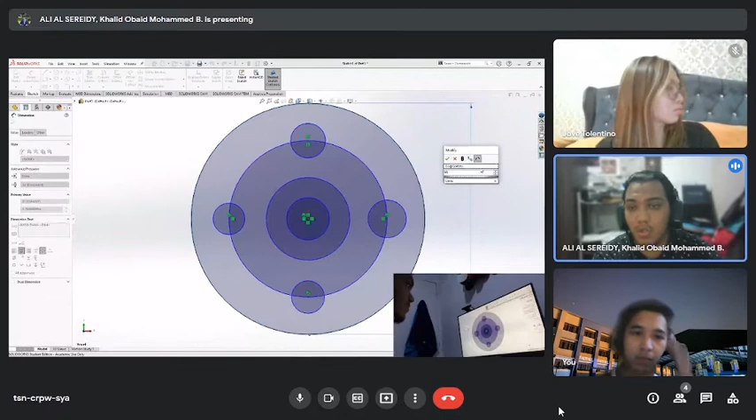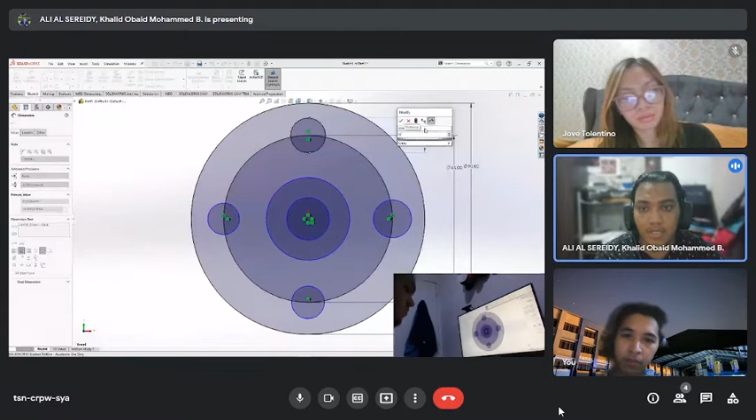After that, we're going to use the Smart Dimension tool to set the dimensions: 90 diameter, then 65 diameter for the distance from the center point of the smaller circles. Each small circle is 12.5 in diameter. We also have two more different circles in the middle, which are 13 diameter and 40.

After that, exit the sketch. Then let us extrude.

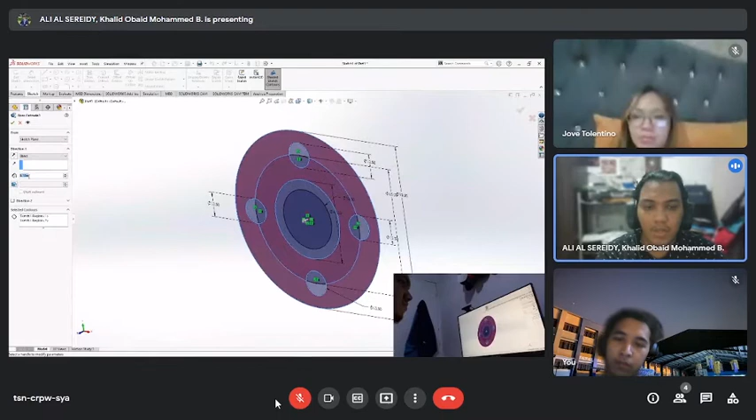Extrude the base. Let's pick the portions and then edit it. Edit the width, which is 14.2 inches. And there we have our first extruded body.

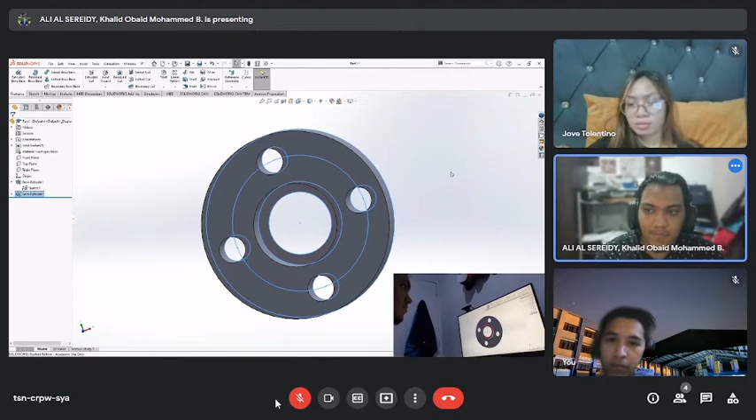So we're going to go back to the sketch from earlier, then choose the next body to extrude. For this one, the width will be 14.2 plus 44.2 plus 6 inches.

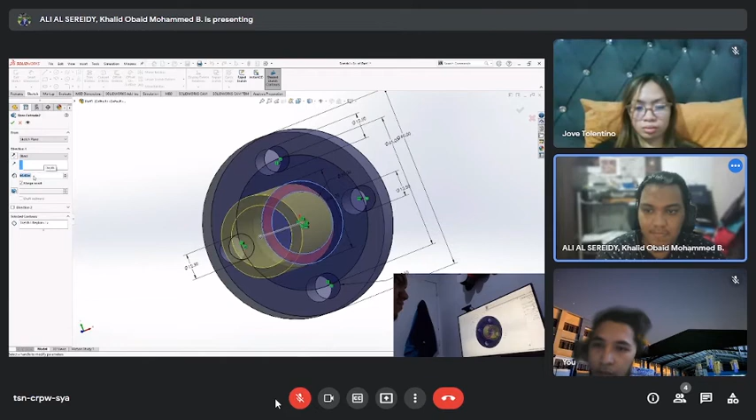So that is the second extruded body done. Next, we're going to choose this face, then the third extruded body, with a diameter of 38 inches and 50 inches.

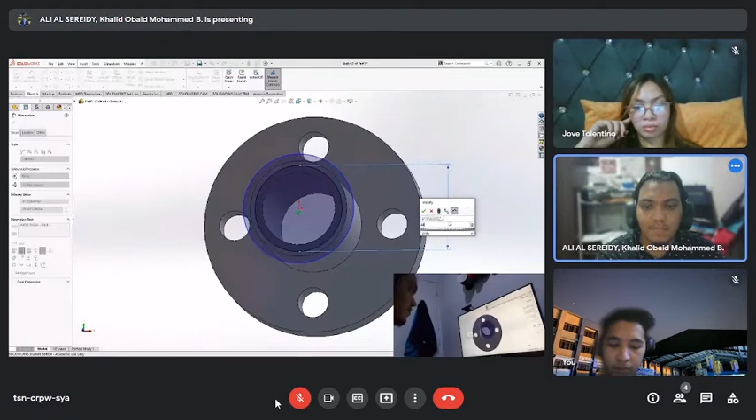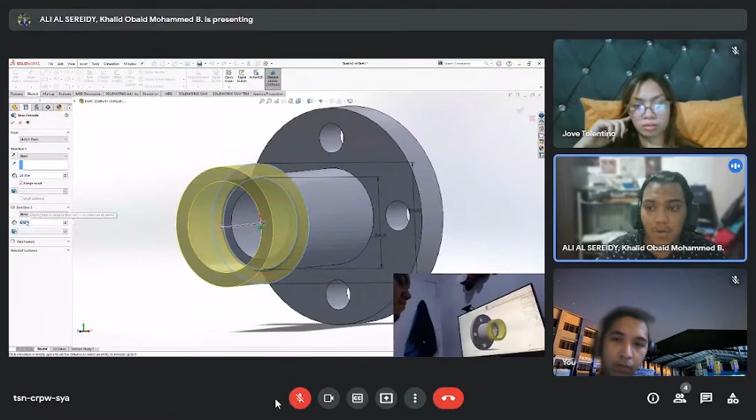And then we're going to extrude that one in two directions. First is upward, which is 24 inches. And since we added 6 inches to the middle part, we're going back for this one, 6 inches. There we go, that's almost our 3D model done.

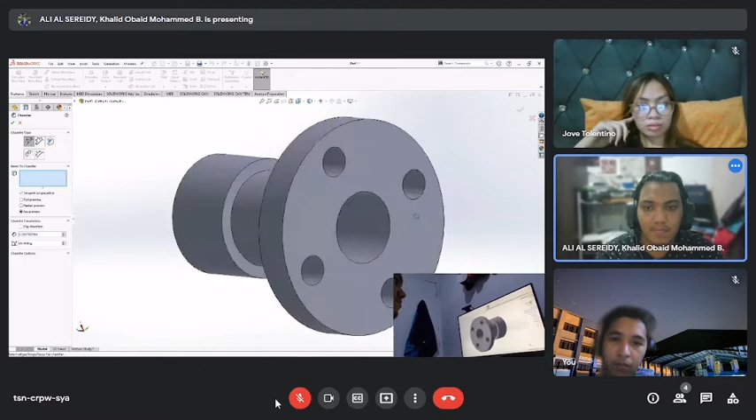We're going to add our chamfers. So the first chamfer will be at the bottom. This one is 3.5 inches.

And next, we're going to also put chamfers on the different edges, which we just estimated from the given model. Since there were no given dimensions, we made each chamfer 2 inches.

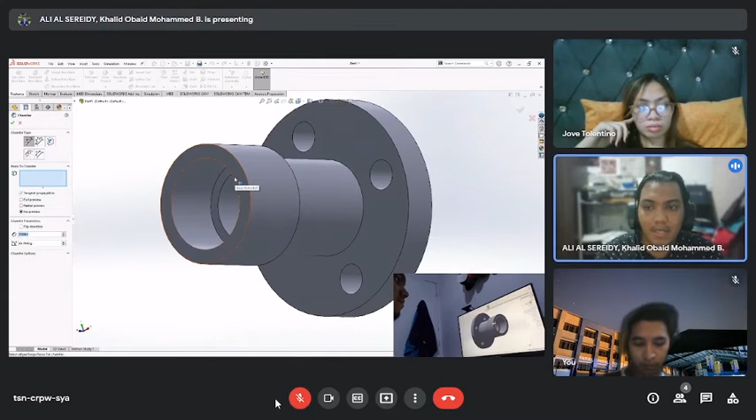And there we have it, that's our 3D figure done.

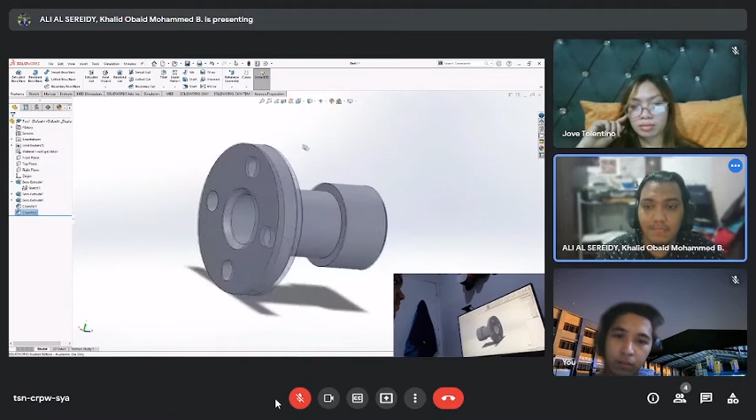And now we're just going to save this one, and then we're going to use this part for the template. Put the isometric figure in the center, scale that to 1:15.

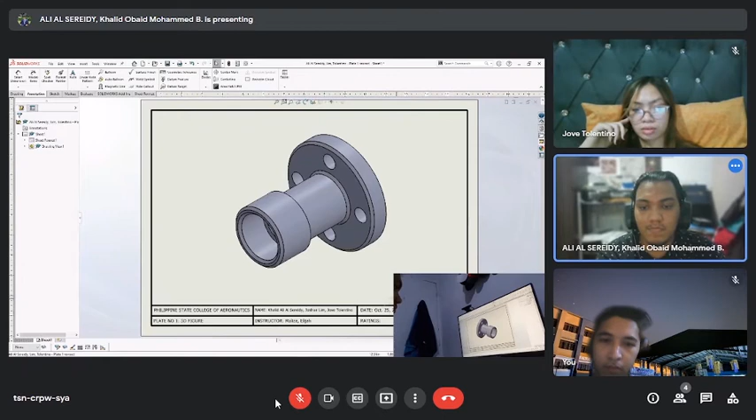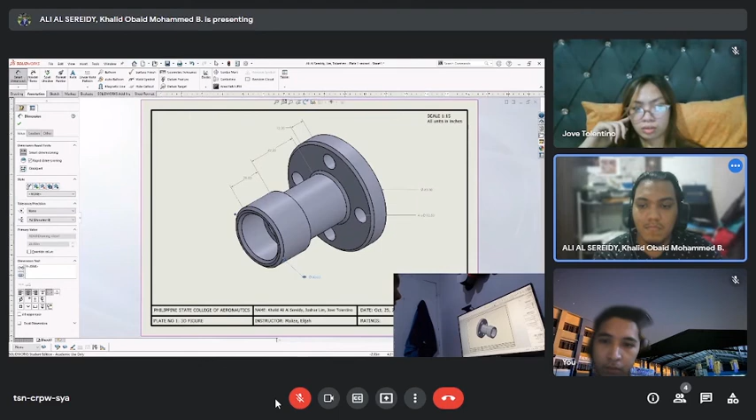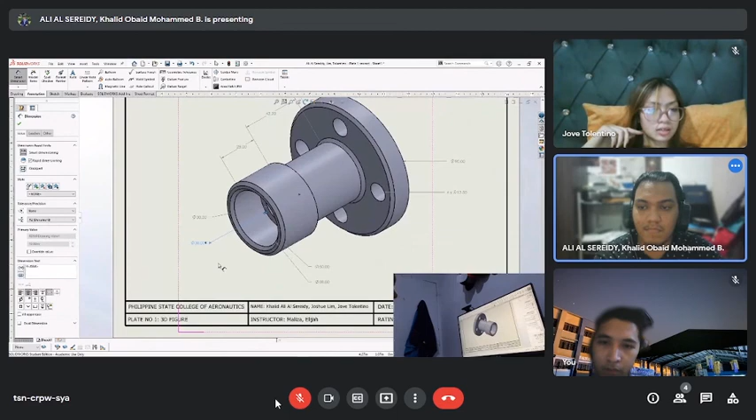And then we're going to start adding our dimensions. And that was it—that's our first plate done.